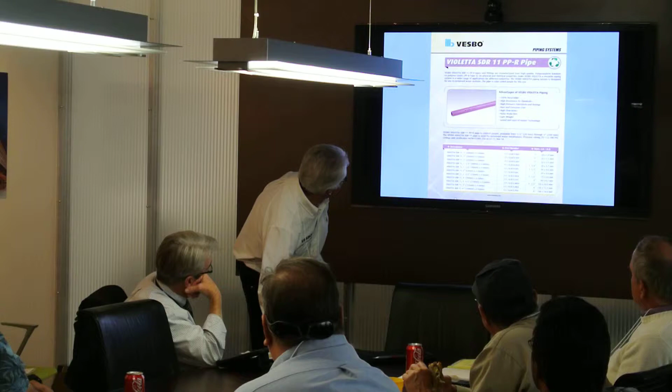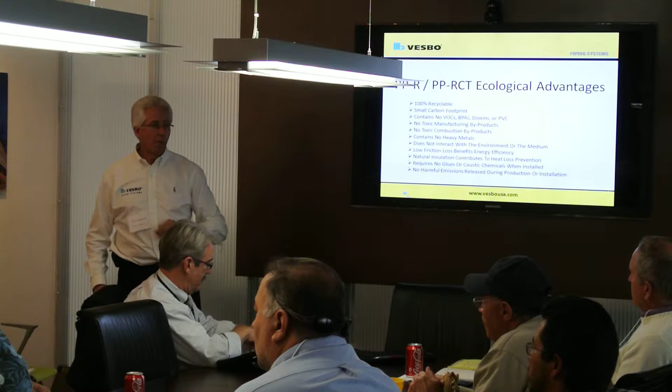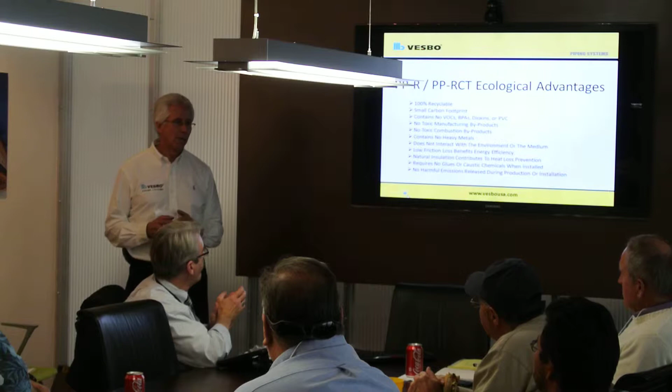PPR versus PPR, PPR and PP-RCT, very similar. The good part is it's a green product. That's part of the reason, kind of as a marketing ploy, we've actually created it in green color. 100% recyclable, but the more important thing is the piping itself, the raw material, the Vesbo is a byproduct of the oil distillation system. So when they're distilling oil, creating gasoline and everything, they actually found something to do with the byproducts, and this is one of the items.

Therefore, there's a lot more of this being produced than can ever be used. So the price is extremely stable, unlike copper and even steel. It is a byproduct, therefore it's green. We're not having to create something new. No VOCs.

Is the machine you have for fusing it together something you have to buy or can you rent it? Depends on the size. For the smaller size, you may as well buy it because, what was that, $260? Something like that.

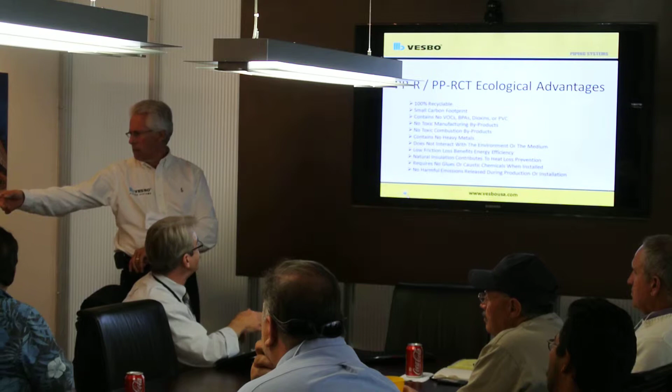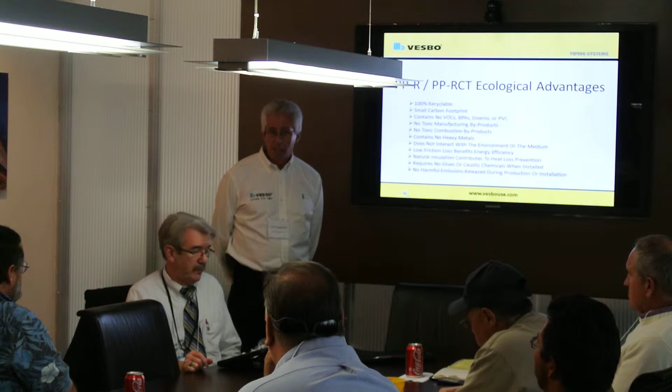I have a lot of industrial chemicals that I deal with, and that pipe seems like it would work because it only lasts so long and then the chemical eats it up over time. Exactly. And if that'll hold up to it, I don't have to replace it so often. Precisely. And the books that we're sending you also have the chemical resistivity charts in them.

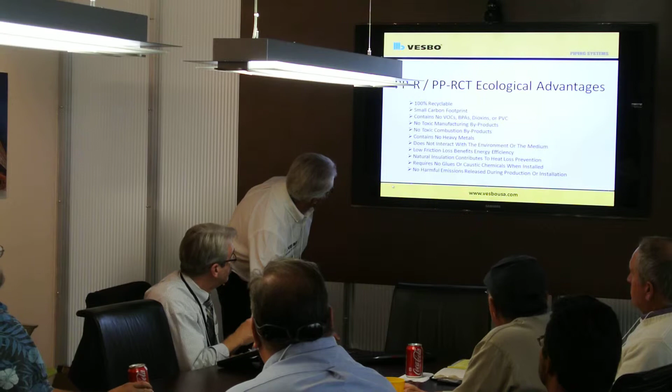The other good thing about it, by the way, and I will say this, the pipe by itself, like most plastics, does not pass the 25/50 flame and smoke spread. However, almost all process piping, almost all piping we use commercially anyway, does get insulated. So if properly insulated, then as an assembly, it is not an issue.

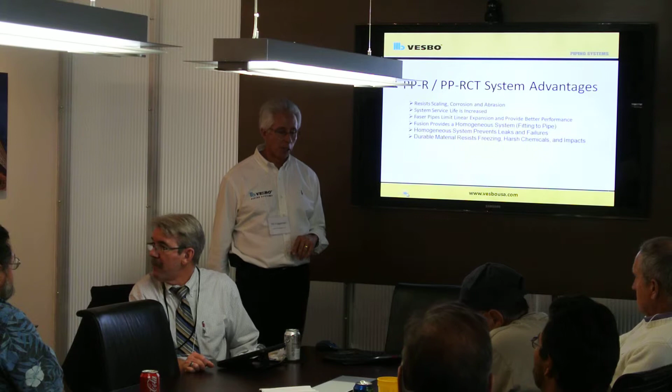The other item, unlike PVC and CPVC, if it burns, we do not get toxic fumes off of it. I mean, we do get fumes, but the majority of the discharge is actually carbon dioxide.

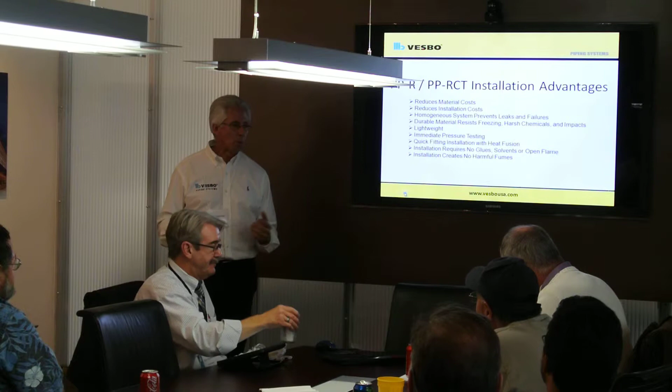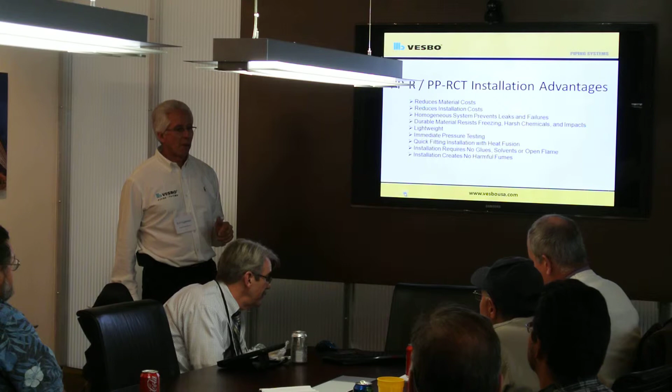Insulated, reduced material costs. The other is structurally, what you're having to hold this piping with, how you're having to support it. Now it is plastic. You still have to support it a little closer together than steel and copper, which we also have the charts for in there. We also have a plastic hanging kit that pretty much keeps it to about the same dimensions.

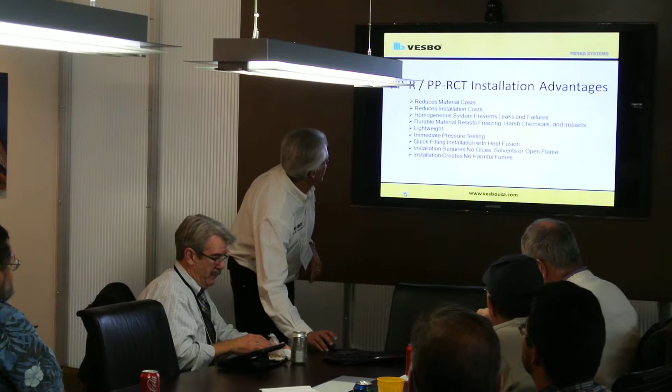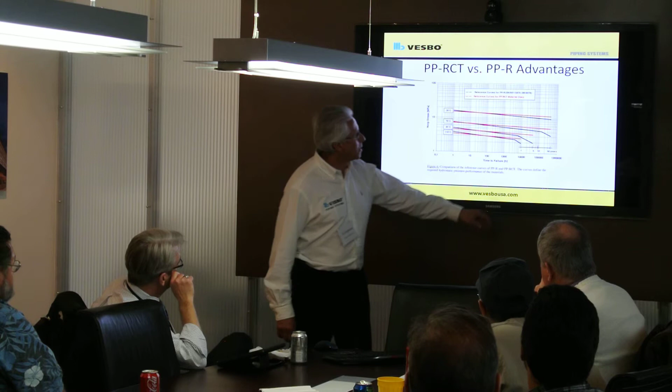Now, one thing, just real quick, the PP-RCT versus the PP-R. The biggest thing, obviously, the red is the PP-RCT, black is the PPR. You can see that, for the most part, they're real similar until you get off to the higher temperatures. Then we fall off, and this is a 50-year cycle, which also reminds me, from an engineering standpoint, it's a relatively new material here.

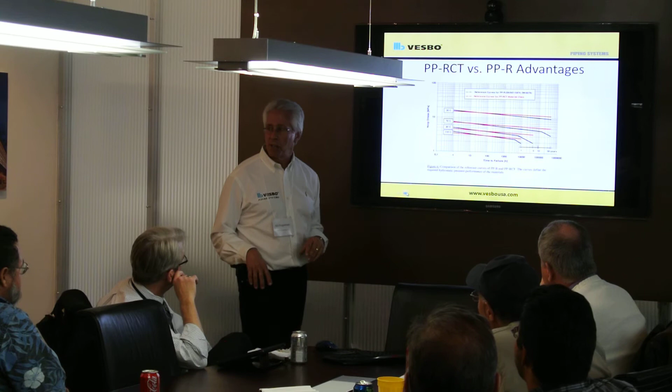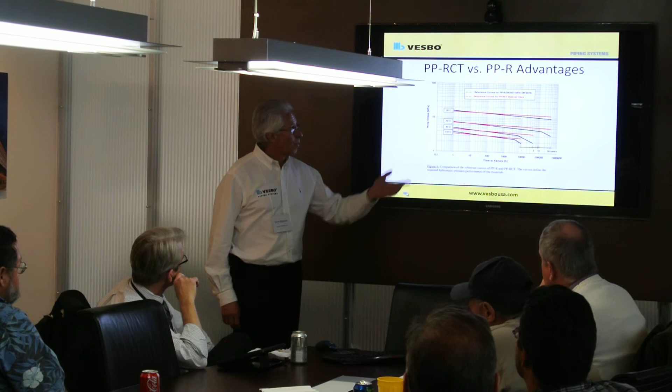In Europe and Asia, it's been around more like 20 years. But we do offer, unlike any other piping system, a warranty, and the life expectancy is 50 to 100 years, depending upon what you're doing with it.

Do you have something where you can mate it to different metals? In other words,